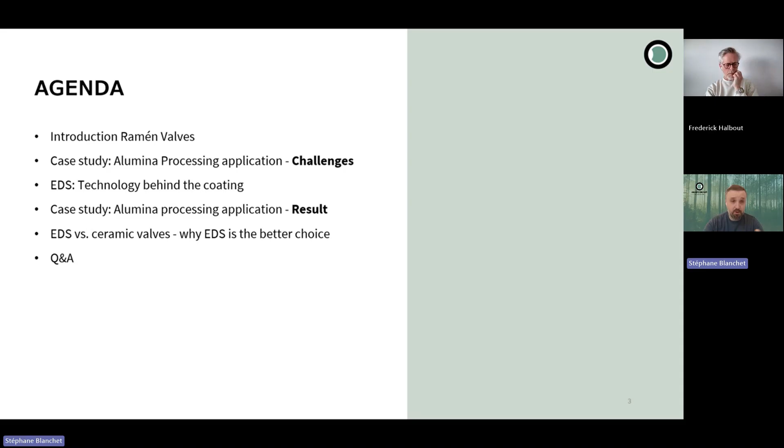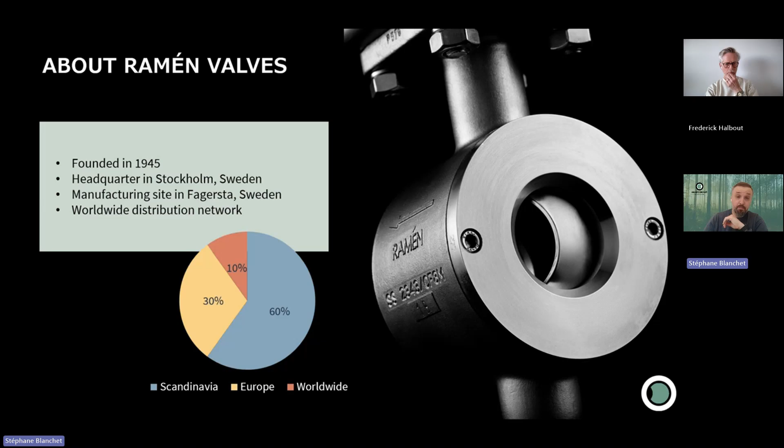Ramén is a Swedish valve manufacturer with production capacity in Sweden, producing control valves and process valves in Sweden. And this is our sales pie chart here.

The first one is rangeability. A Ramén ball sector valve has a 300-to-1 rangeability, so you can use this type of valve for applications where you have a big difference in flow.

And the second one, which is of interest here, is for abrasive applications, and that's why we use this type of valve for a lot of process industries: pulp and paper, steel plants, mining, chemical, food, for example coffee plants, sugar plants, and things like that.

Obviously for abrasive applications, we already use some kind of hardening treatment. Since 2022, we use SuperExpanite treatment, which will be developed by Frederick later on. We have been using that instead of traditional hard chroming, because traditional hard chroming has been forbidden in Europe for a few years. So we are not allowed to produce valves with hard chroming, and our customers are also not allowed to purchase products with hard chroming.

So we have been successfully using Expanite for a few years, with a lot of success, and it really performs as good as hard chroming actually.

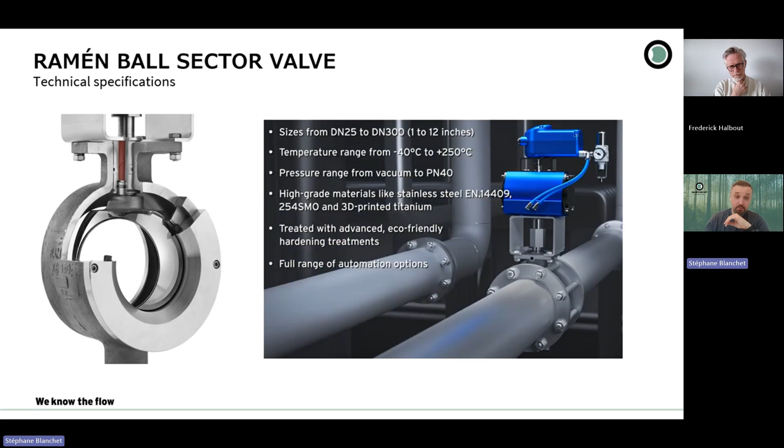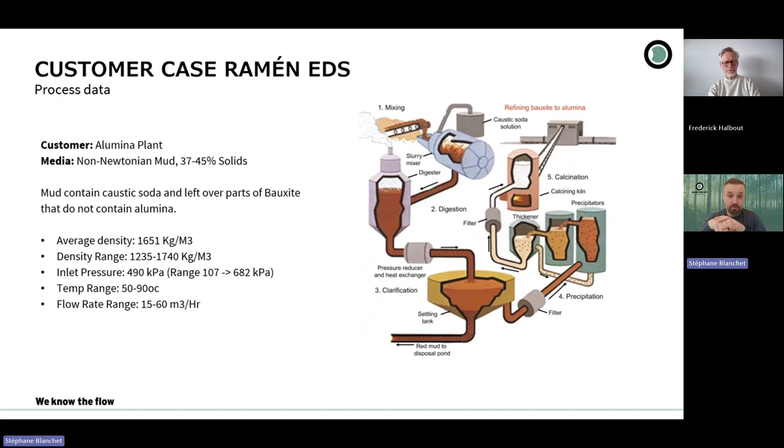Also kind of corrosive, because you have caustic soda, with a high delta P, because the outlet pressure is atmospheric. So it's a combination of corrosive, very abrasive application, with some high velocity also happening inside the valve. Let's move on.

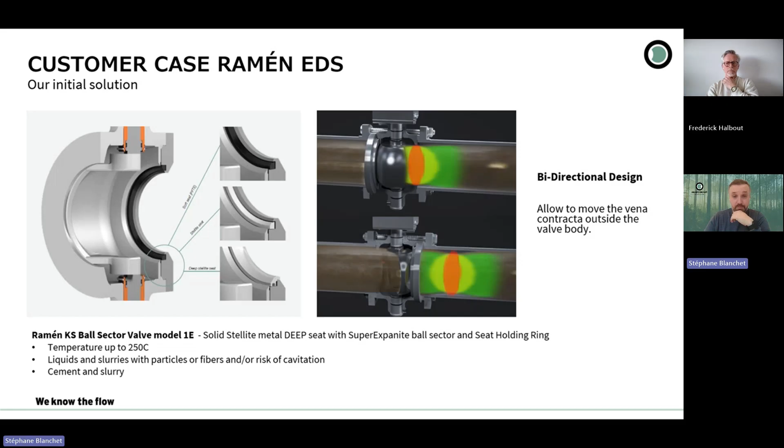Fortunately, we have a customer with whom we have very good communication, and together we tried to find a solution to improve its lifetime, to make sure that we can improve the lifetime and investment for this type of valve.

So we were thinking, okay, what can we do in that case? We know there is obviously ceramic valve in the market, so why can't we make this kind of ball sector valve with a ball sector covering some parts in ceramic to increase the hardness and improve the lifetime? We were thinking, okay, we can do that, but then obviously the cost and availability will be much worse - the cost will be very high, and also very long to produce this type of valve.

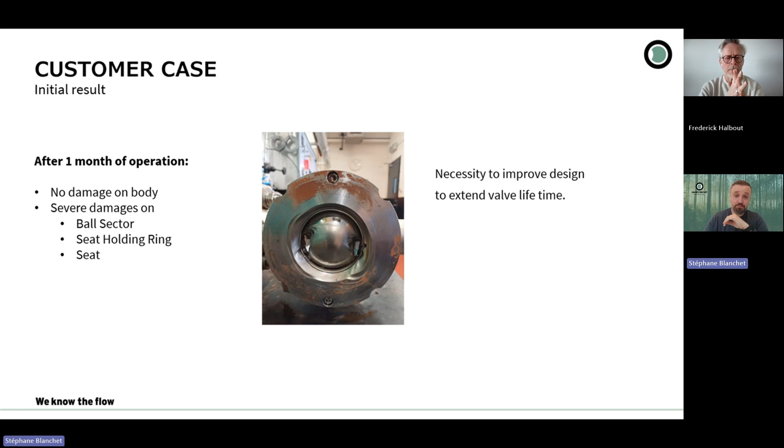So we were thinking outside the box to see what kind of other coating alternatives we can do. Because at the end, the idea was to increase as much as possible the hardness, to fight as much as possible the abrasion - to make sure there is no abrasion, we want a material as hard as possible. This is where we came up with this new coating, because we tried a lot of different solutions, and this is the one that at the end we got the best result by far, and this is the one we're actually talking about right now and releasing into the market.

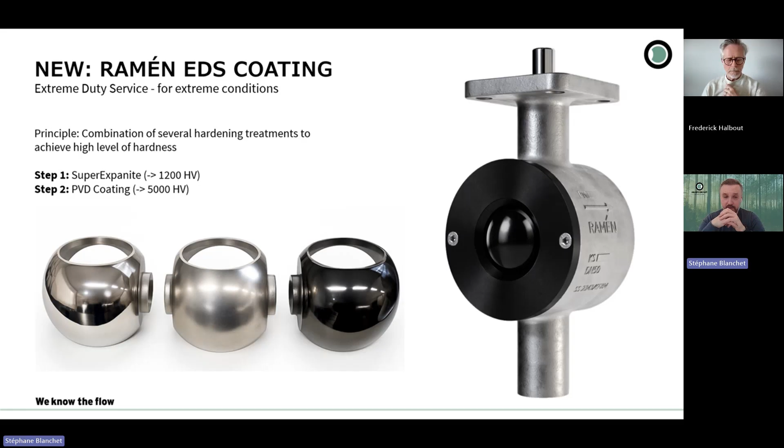All right, and now I think I will let Frederick talk in details about what is SuperExpanite, what is the PVD coating. Yes, so I'll let you, Frederick, continue.

Thank you. So, first of all, quick introduction. My name is Frederick Halbout. I work for Expanite in Denmark, which is a heat treatment company with a specialized focus on surface hardening of stainless steel, nickel-based alloys, and titanium alloys.

So what it is we do is surface hardening, improving the surface hardness on stainless materials. By that, we also improve the wear resistance, galling resistance, and for some alloys, increase corrosion resistance or maintain corrosion resistance in the material, which is one of the very special things that we are doing or have succeeded to do.

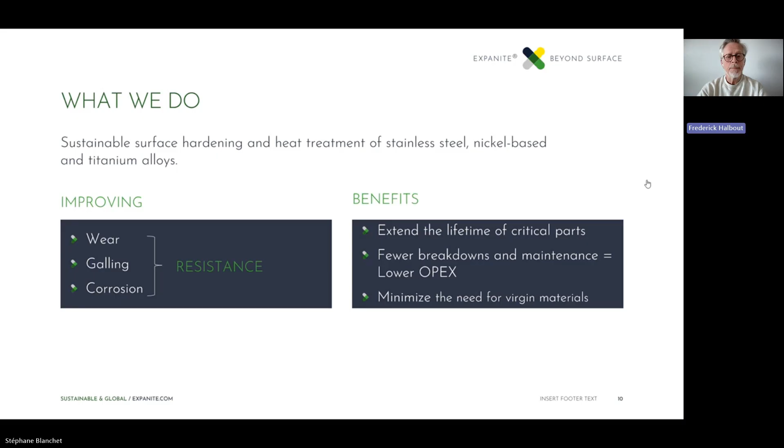There's also another benefit: the fatigue resistance is also increased. It doesn't say here on the slide. But if you go to the next slide, there's a slide overview on the yellow dot that explains what we do for Ramén as a treatment that we call SuperExpanite, which is a combination treatment.

To give you a little bit of image of what it is that we are doing for this SuperExpanite treatment, it is in 2 steps. The first step is called ExpaniteHigh-T, which is a process conducted in a vacuum chamber up in a high temperature up to 1150 degrees Celsius.

In this step, we dissolve nitrogen into the material, and due to the high temperature, we have a deep diffusion of the nitrogen, increasing the hardness of the core somewhat, with a reach of up to 500 microns here, but for austenitic stainless steels, there is actually up to 1,000 microns diffusion depth.

Once the diffusion has been done, there is a quick quenching with either nitrogen or argon to get a stable situation and no transformation of the material during cooling down. So we need to do a fast quench.

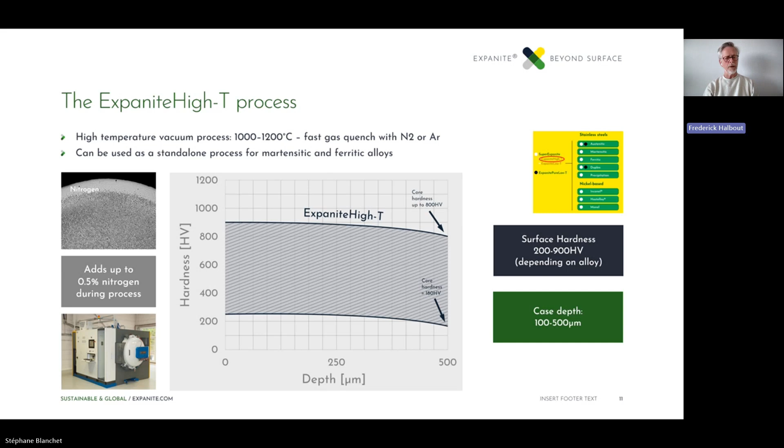If you go to the next slide, you can see the next process step that we are doing is called ExpaniteLow-T. That is conducted in an oxygen-free environment, not vacuum, however, at lower temperatures, around 450 degrees, can vary of course. This is a nitrocarburizing process where we diffuse nitrogen and carbon into the surface.

The diffusion depth here is very concentrated to the surface and has a diffusion depth of, as a standard, 20 microns. We can play around with those depths a little bit, from 10 to 30 microns, but it's not recommended to go over 30 microns due to the compressive stresses built up in the surface. But 20 microns is more than enough in many applications.

And in this step, this is where we add the high hardness on the surface. As a standard, the hardness lies around 1,200 Vickers in hardness, and the case depth is around 20 microns.

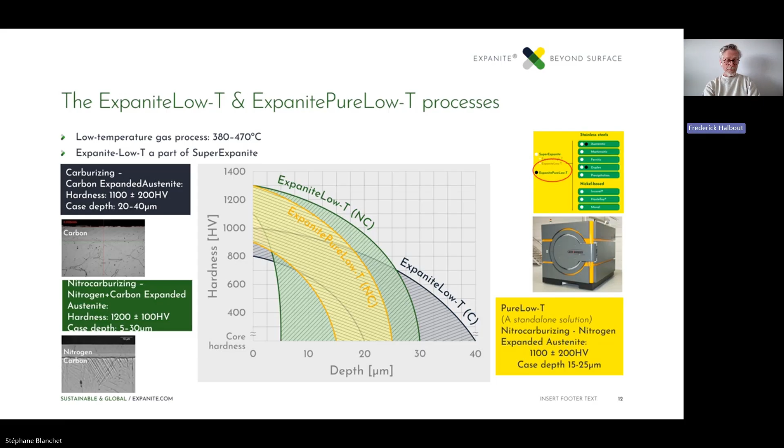There is a new development on this side as well, called the ExpanitePureLow-T process, which is a totally different story, but this is also a process done as a standalone for austenitic stainless steels. A little bit more complicated, but the outcome is basically the same. Not all components are suitable for this ExpanitePureLow-T process, but it's been very successful for housings and also for fasteners, bolts and nuts, and so on. But that's another story.

So if you go to the next slide, the result of the SuperExpanite process is, when you combine the high temperature treatment with a diffusion of nitrogen deep into the material, but with a less hard surface at the end, combined with the ExpaniteLow-T process, you get the SuperExpanite. Then you have the high hardness with a diffusion depth of 20 microns, followed by another hardened zone going deeper into the material, bringing a very nice and ductile situation on the surface and deep into the material.

And the nitrogen in the material helps bring or stabilize the corrosion resistance in the material, that's the general idea. But in some cases, it actually helps increase the corrosion resistance somewhat as well. And that's the main thing about Expanite.

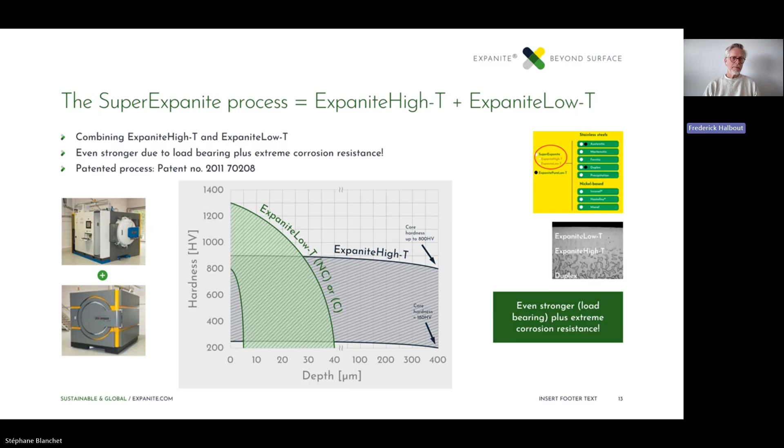It is surface hardening, and there are many ways you can surface harden a component. But if it's made from stainless steel and you want to maintain the corrosion resistance in the material, you have to choose a method to surface harden that allows the corrosion resistant properties in the material to remain the same or actually improve them. If you go to the next slide.

As Stefan mentioned, the hardness is 1200 Vickers, and it's a good replacement for, for example, hard chrome, which is less hard than that. But in other applications, such as the one Stefan mentioned, where there can be abrasive particles that have a higher hardness than the surface we provide, you may need an extra layer of coating.

I should also mention, while I'm on coating, that even though it sometimes looks as if Expanite, the SuperExpanite, is a coating, it's not - it's a diffusion. It's something that goes into the material; the material stays the same, no buildup. PVD, on the other hand, is a coating. It's a very thin coating, but it has a very, very high hardness and offers good protection for high wear particles in an application such as the one Stefan just showed you.

So what is PVD? For those who don't know, PVD is a ceramic coating. It's a thin layer of metallic material that's deposited onto another surface, and PVD actually stands for physical vapor deposition. It's performed in vacuum, and it's nitride. So I'll try to explain here.

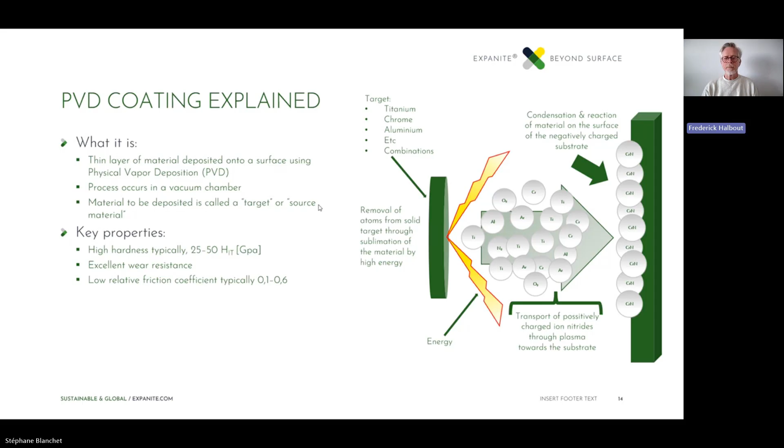The thickness of the coating is no more than 3 microns, plus or minus. You can make them harder, but not much thicker. So if you go to the next slide.

So then why do you need an Expanite treatment? If you have this high hardness in the PVD coating, why do you need to do an Expanite treatment on the part before you do the PVD? Well, stainless steel, especially austenitic stainless steel, is very soft - actually way softer than recommended for any PVD to be put directly on the surface. It can be done, but especially when there's a case of...

...plastic deformation, such as in this application that Stefan told you about, where there's high velocity, there may be movement that's bigger in the material than is allowed for the PVD, and then you can have an eggshell effect, such as in the picture on top. So if you do an Expanite treatment before the PVD, you have an increased hardness on the surface on which you can put an even harder coating.

Illustrated as if you take a pane of glass, put it on a mattress, and stand on it - it will break. But if you put a bit of plywood between the mattress and the pane of glass, you should be able to stand on it. That's the general idea - you get better load bearing for the material, so it can withstand impact much better. Choosing Expanite for this is, of course, to maintain the corrosion resistance in the material, because as Stefan also said, the environment where these ball sectors are is highly corrosive.

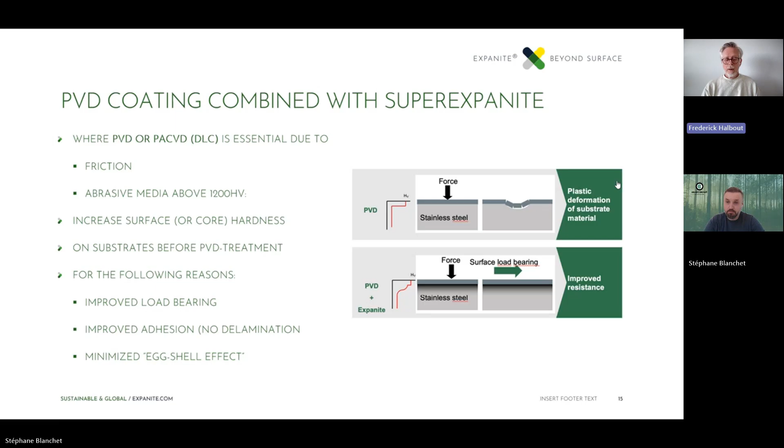I think that was it for me. All right, thank you, Fredrik. Then I will take over.

Thank you. I will summarize what we can provide at Ramén with our new EDS coating, starting with hardness. Remember the standard material we provide is stainless steel, which is a soft material, around 200 Vickers on the hardness scale. Most ball sector valves we provide for abrasive applications are treated with SuperExpanite, which as Fredrik mentioned is around 1200 Vickers, already very hard - 6 times more than stainless steel - and this covers most cases for abrasive applications.

But as we know from the customer case we had, sometimes it is not enough. There are ceramic coated valves in the market that are much harder than SuperExpanite or hard chroming. But with the Ramén EDS coating, we can achieve twice that hardness - up to 5,000 Vickers. This is where we can provide a lot of improvement compared to what's currently in the market.

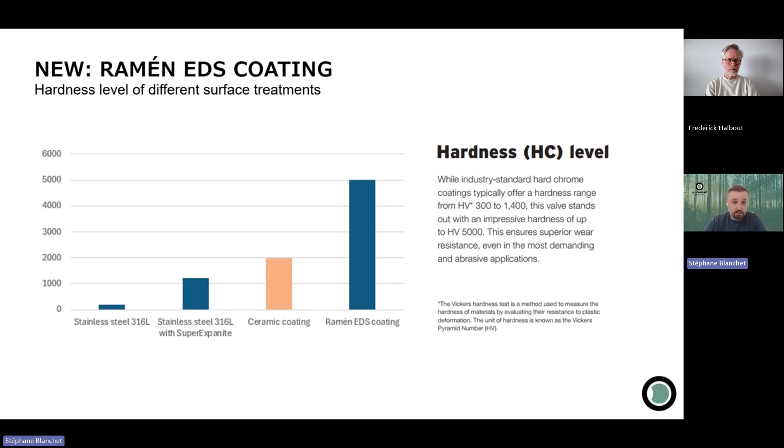We also have other ongoing tests at some mining plants, steel plants, and sugar plants, but it obviously takes time to get results. Hopefully in the next few months we'll have more customer cases to show you.

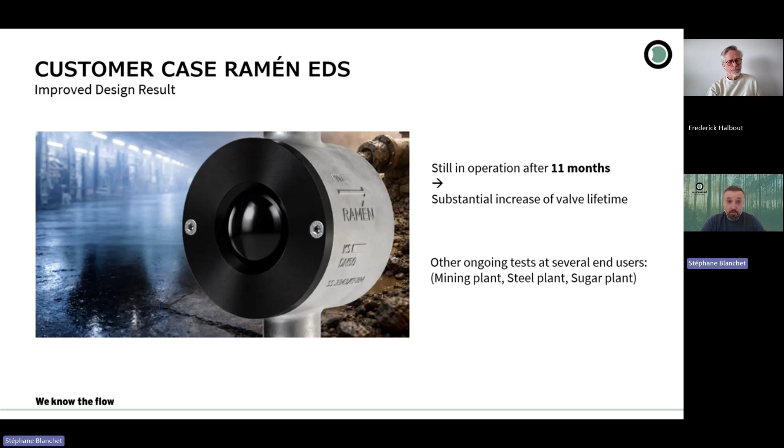To end this presentation, I'll make a small comparison with traditional ceramic valves - specifically ball valves and butterfly valves with ceramic liners, which is mostly what ceramic valves are, and what the Ramén ball sector valve with EDS coating can provide in addition.

First, better controllability: a ball sector valve has equal percentage characteristics, making it a very accurate control valve that can control between 10 to 90% opening - very accurate, sometimes used for dosing applications where we need to control a few millibars. This controllability has been proven for decades, while a butterfly valve can only control between 30 to 50% opening, for example, so its controllability is much worse.

It's also much more cost effective. Roughly, a Ramén ball sector valve with EDS coating will cost around 10% extra compared to a ball sector valve with a metal seat, which is cost effective compared to a product made with ceramic parts, which could cost 3 to 4 times more. So we have an extra cost of 10% compared to 3 to 4 times more.